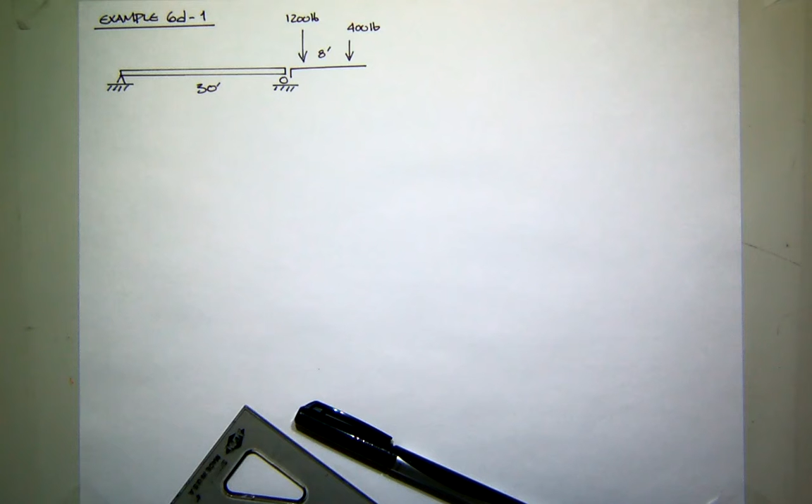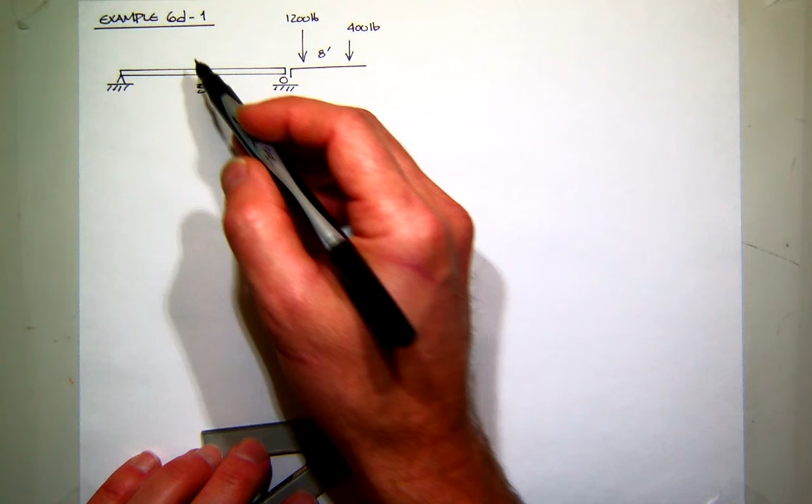Okay, so in this problem we have a simple supported beam that's 30 feet long, and we have this set of moving loads moving from the right side to the left side, and we're trying to find the location of the maximum moment.

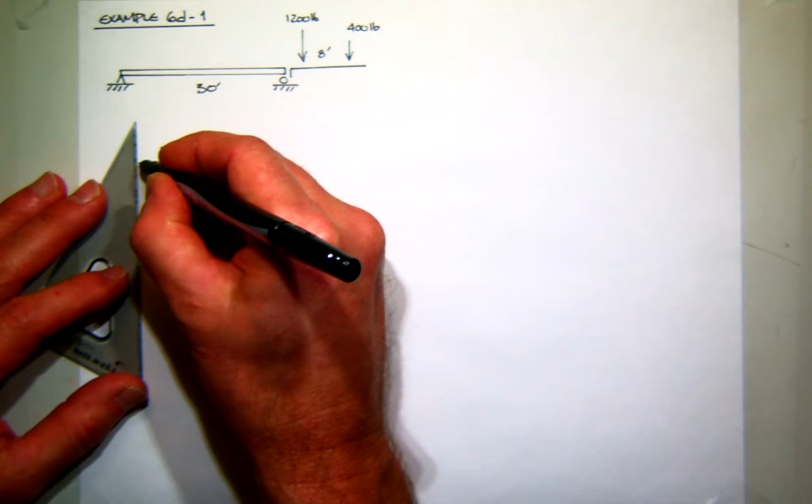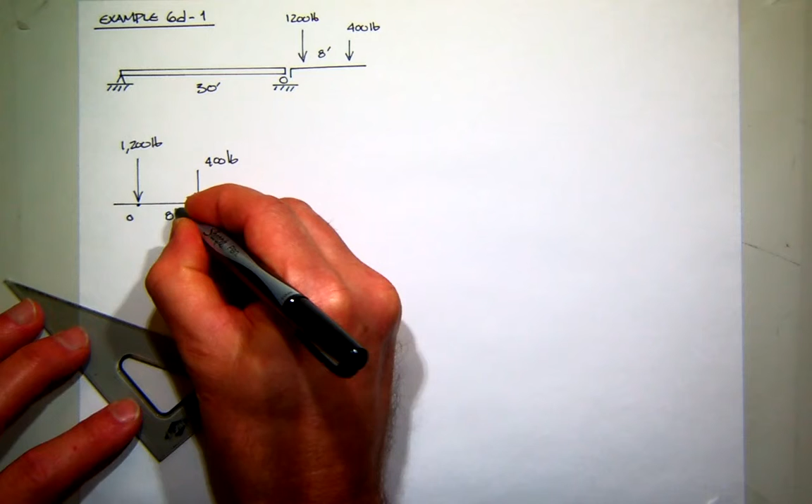Well, the first thing we're going to do is find the concentrated or resultant force and its location. So what I like to do is come down here and redraw it. So I have my 1,200 pound force and my 400 pound force, and just kind of imagine them on a line. Call this point here, say O. This is 8 feet.

First of all, what's the concentrated equivalent force? Yeah, the resultant is just going to be the two values put together. So I got 1,200 pounds plus 400 pounds, which is 1,600 pounds. So somewhere in here is my concentrated equivalent force, 1,600 pounds. That's a funky 6, but you get the idea. And I'm going to say it's some distance x

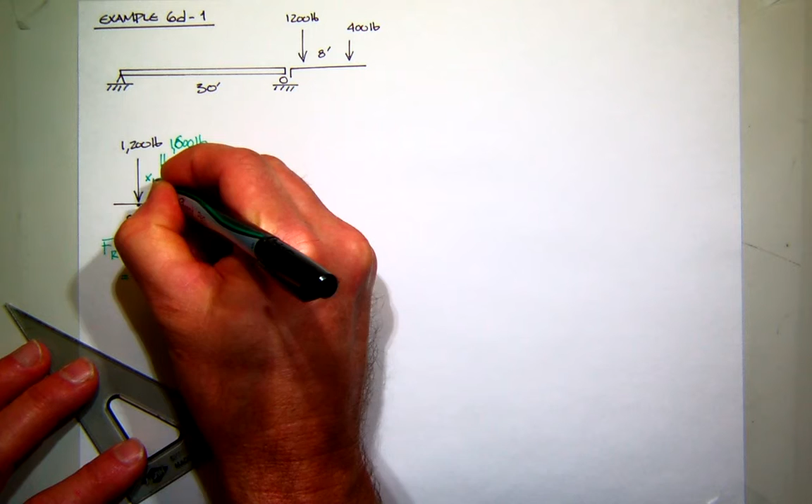from point O. So what I'm going to do is I'm going to sum moments. Not in equilibrium, they just have to be equivalent. So when I sum moments, and I'll use right-hand rule, I'm going to sum moments about that point O. When I do it for the real force system, I get minus 400 pounds times 8 feet, which is minus 3,200 pound feet.

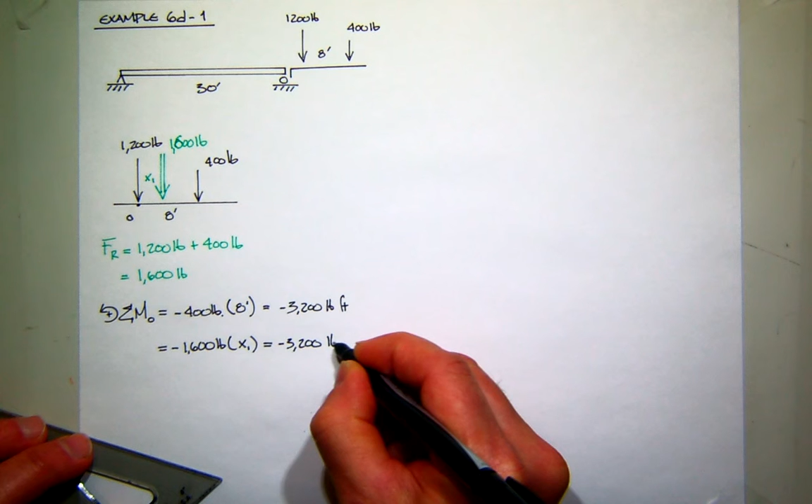And I do it again now for my concentrated or resultant force, which would be minus 1,600 pounds times x feet. It needs to be equal to exactly the same. So I can solve for x. What is x? 2 feet. So now I know where it is.

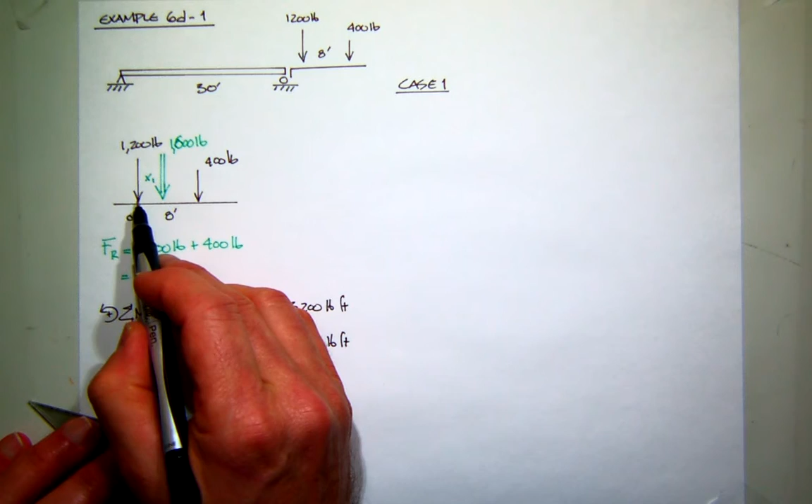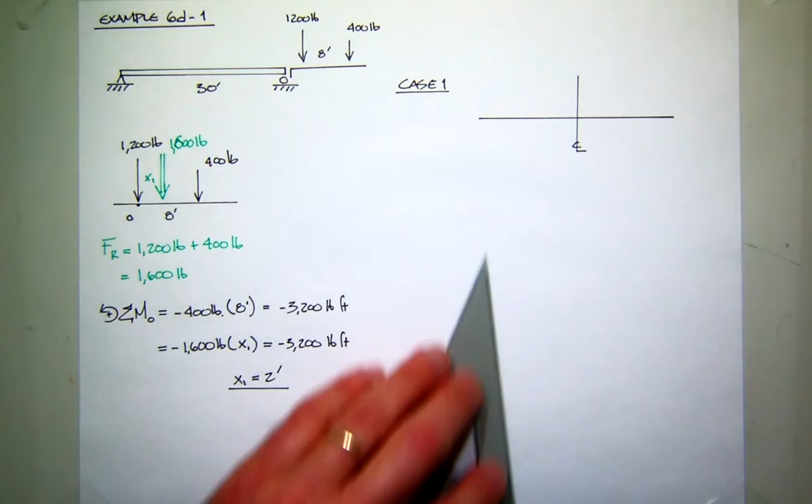So my first case, using this method that we just discussed, is to about the center line of the structure balance the first force and the resultant force. I'll try to draw this a little bit larger. Let's see if I can do it. So here's the center line. So I'll balance it. So on one side I'll have my resultant force of 1,600 pounds, and that will be 1 foot on this side, and 1 foot on the other side is my 1,200 pound force.

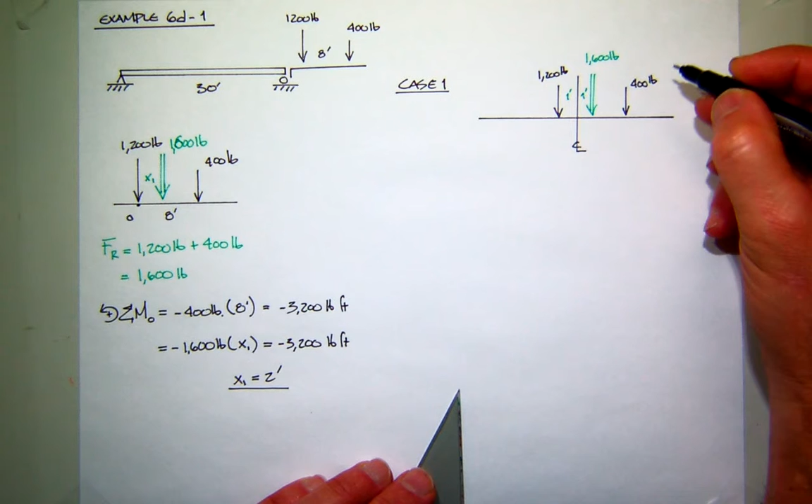Then how many feet back to the 400 pound force? Well, from the resultant, it would be 6 feet. You see that? Now the point I'm trying to find the moment is right here. So I'll call that moment 1.

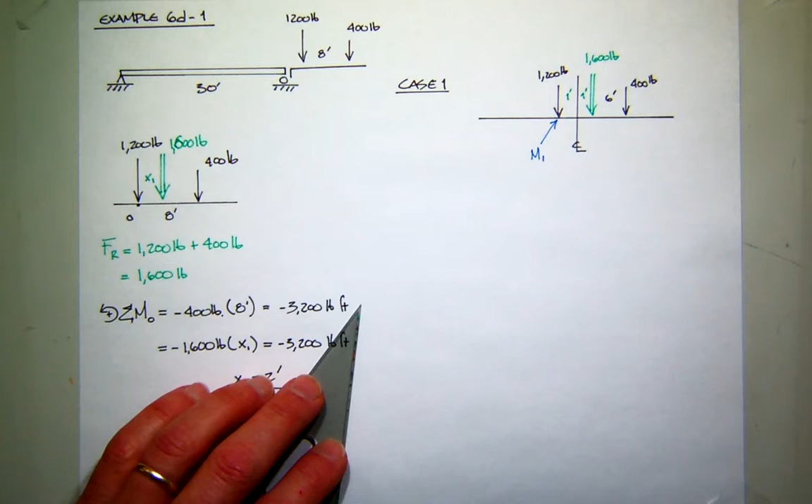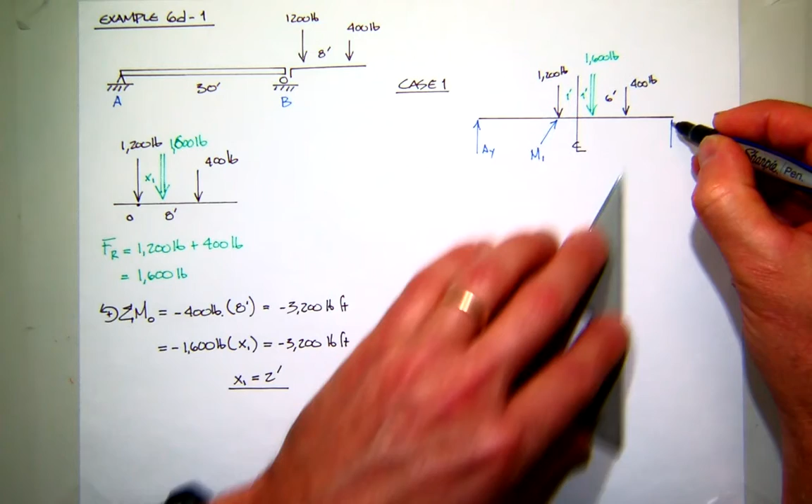So I need to find my reactions, which I haven't labeled this, but let's call this A and B. So I'll have AY and BY. So I think it's pretty simple to see that if you cut the structure here and decide to work the left or the right side, looks like the left side is going to be a lot easier. In fact, all I need to know is AY, right? And I should be able to find the moment here. If I work this side, I'd have an additional force to deal with. So let's do that. So I need to find AY.

How do I find AY for this structure? I'm going to sum moments at B. Now here's where you have to make a choice, and I think the choice is a simple one. Do you work the real force system or the equivalent force system? The equivalent force system. You don't do both together. So I'm just going to use the equivalent system.

So when I sum moments at B, the only thing that's creating moment about B is my resultant force and AY. So the resultant force creates positive moment. What's the distance from B to that? 14. Well, the whole thing is 30, so the center line would be 15, right?

So it looks like it's going to have a moment arm of 14. And then AY creates negative moment with the moment arm of 30 feet. So what's AY equal to? Somebody will have to help me with that. 1,600 times 14 divided by 30.

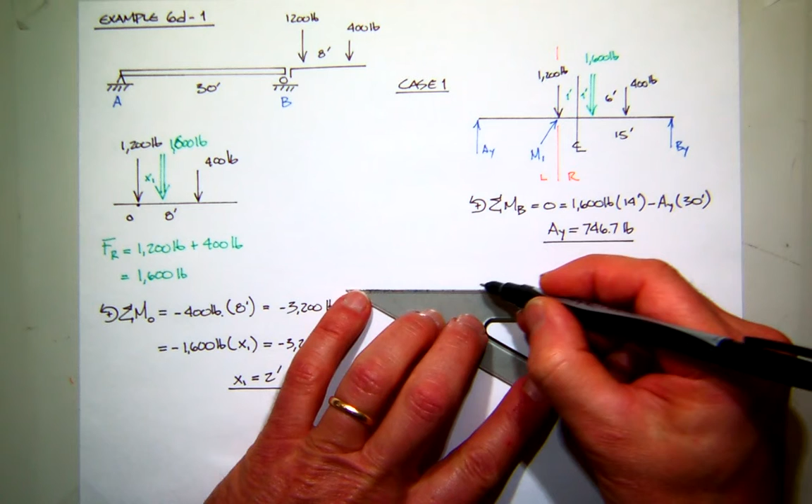Okay, so now I cut the structure. Look at the left side. I have my reaction, 746.7 pounds, and I have my internal moment. I'll call it M1. What's this distance? What's the distance from A to here? 14 feet.

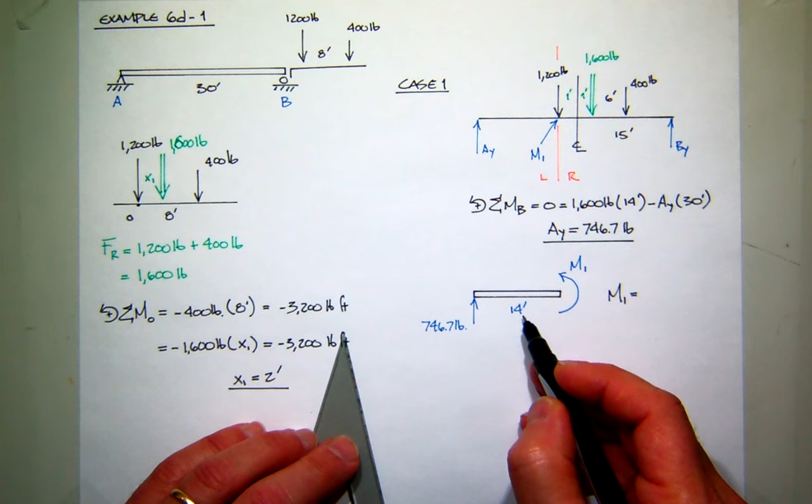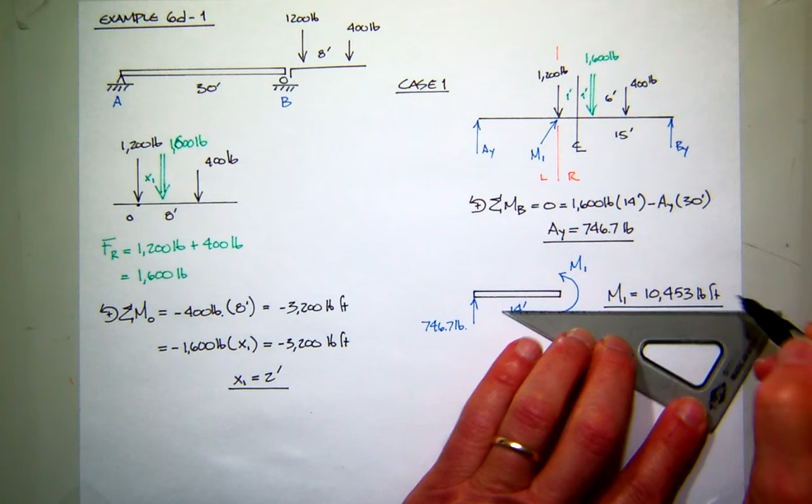So I think you can see if you sum moments, the moment's going to be equal to 746.7 times 14, which is 10,453 pound-feet. So that's the moment at that position. Everybody see that? So now I just have to do it again.

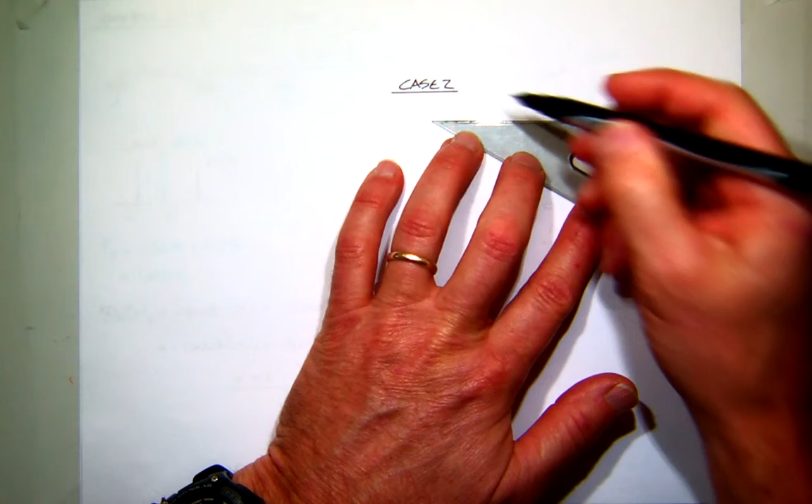I'm kind of running out of room here, so I'll just put a second sheet down and get it in the right spot, and we'll call that case 2. So again, I'll draw my beam, and I'll locate the center line. Now this time, I'm going to position the second force in the sequence with my resultant force.

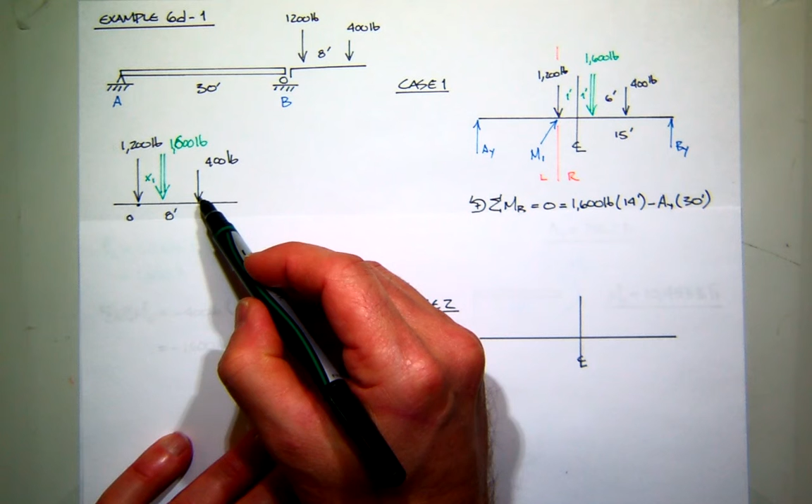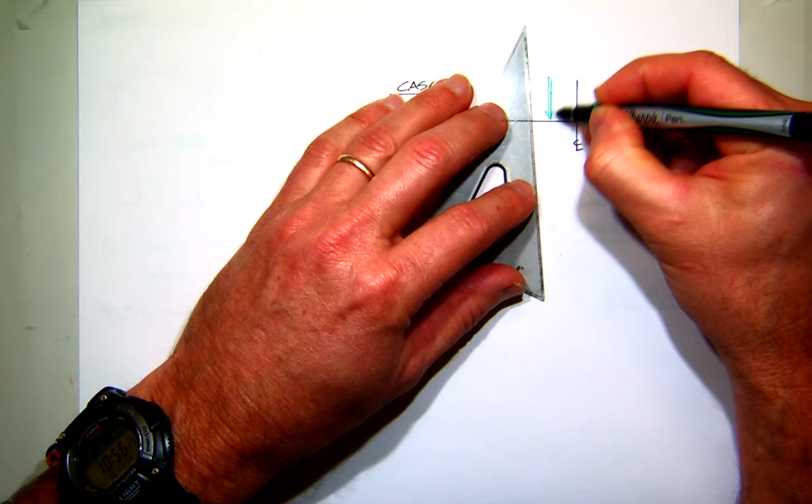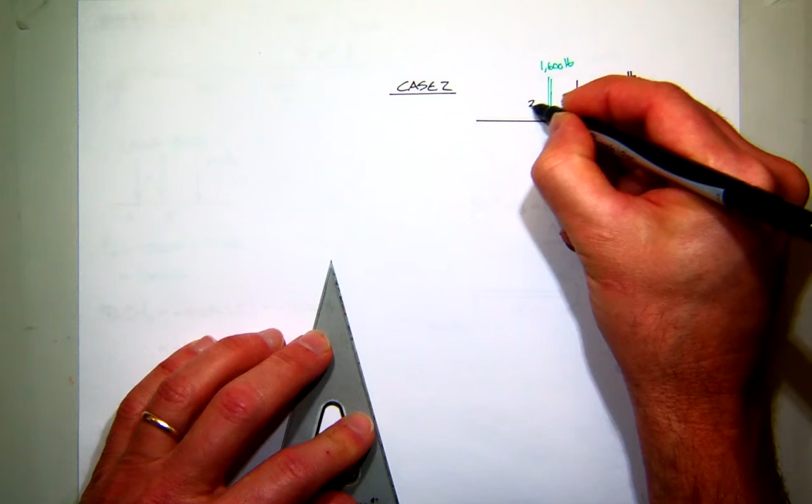That has a distance of 6 feet, so that'll be 3 feet. So in that case, I'll have the concentrated or the resultant force here, that's 1,600 pounds, at 3 feet, and then 3 feet behind it will be the 400 pound force, and 2 feet in front of it will be the 1,200 pound force. And where am I looking for the moment? Right there. Call that moment 2.

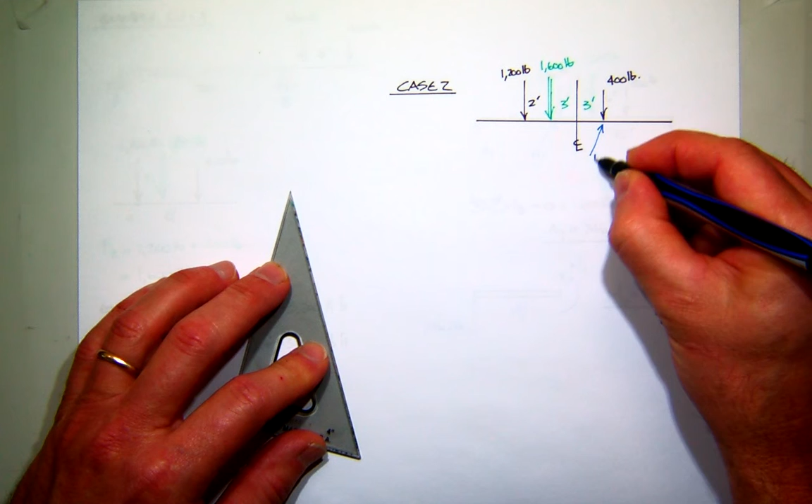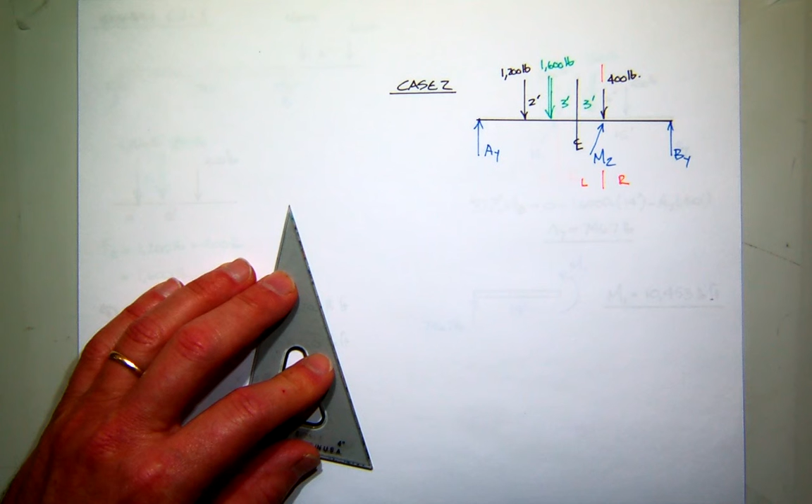So when I'm evaluating this structure, I have reactions at A and B, and I'm going to cut the structure here. Do I want to work the left side or the right side? Looks like the right side is going to be easier. If I work the right side, I need BY. So when I find BY, I'm going to do what? Sum moments at A. So let's sum moments at A, make sure I'm in equilibrium. Again, we have to use either the real system or the equivalent system. I think the equivalent system is simpler.

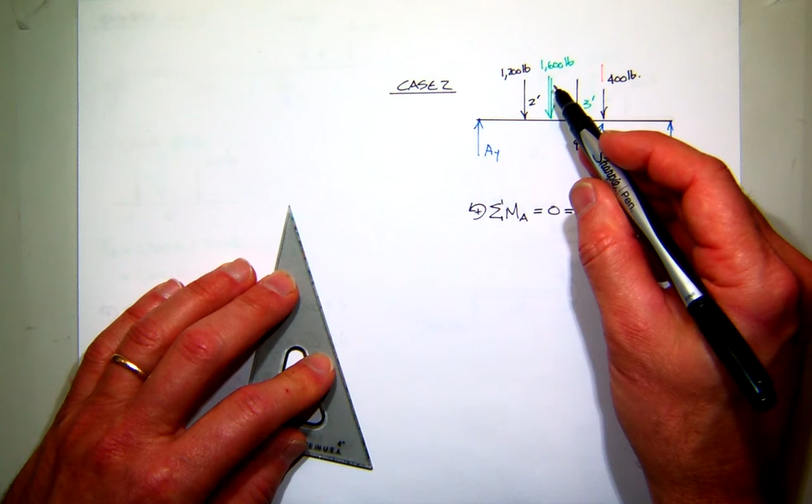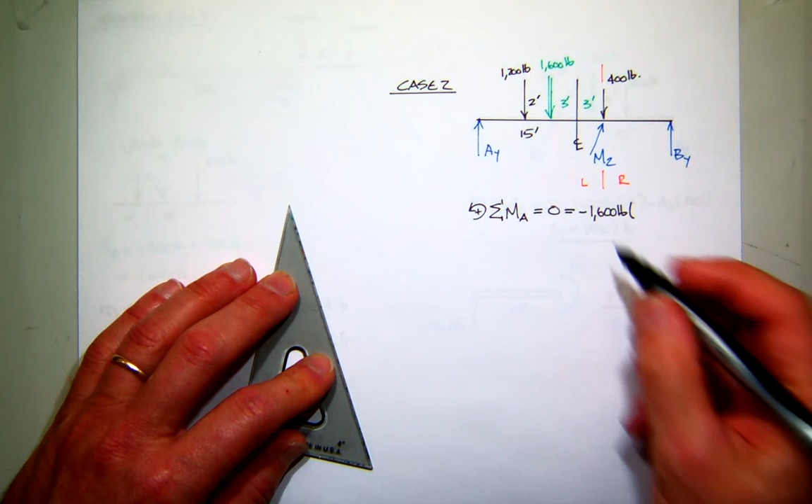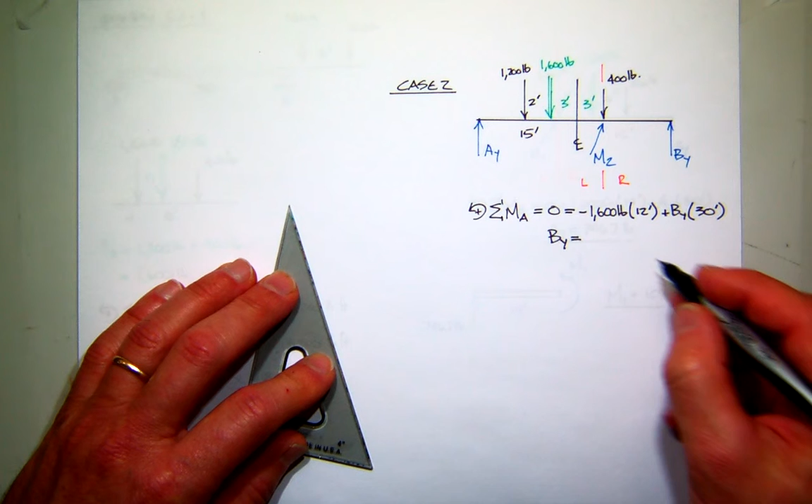So summing moments at A, the resultant force creates negative moment about A, has a force of 1,600 pounds, and a moment arm from here to here. Remember, the total distance is 15 feet, so it looks like it's going to be 12 feet. And then BY creates positive moment at 30 feet. So what's BY? 1,600 times 12 divided by 30. Negative 640 - negative? Oh sorry, I didn't mean that. Okay, 640. Yes, sir. Okay.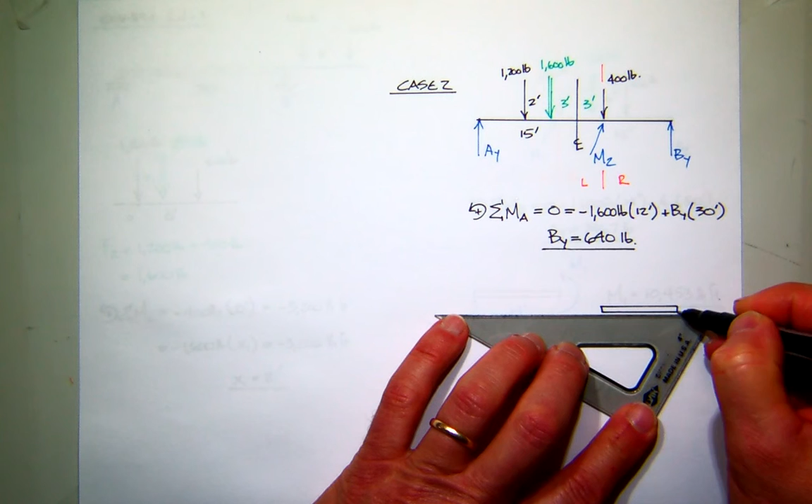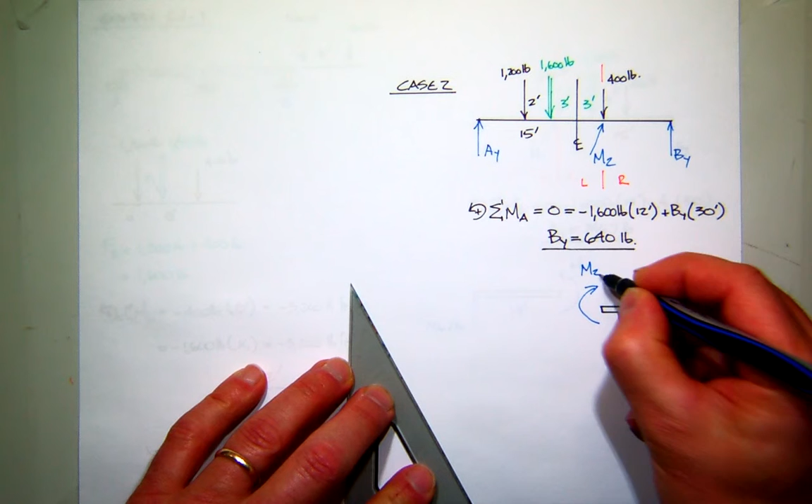And now we're working the right-hand side, so I'll draw a free body for that. And on that, we have our BY reaction, which is 640 pounds. And we're looking for this moment here, I'll call it M2, and that distance is 12 feet. So I think you can see the moment at 2 is going to be 640 times 12. What's that? Mr. Isbell, what's 640 times 12? You got 640 in there, multiply by 12. 7,680.

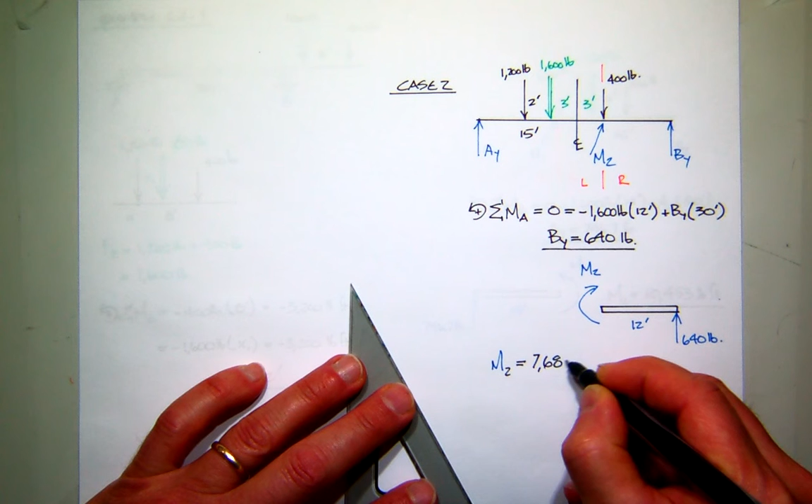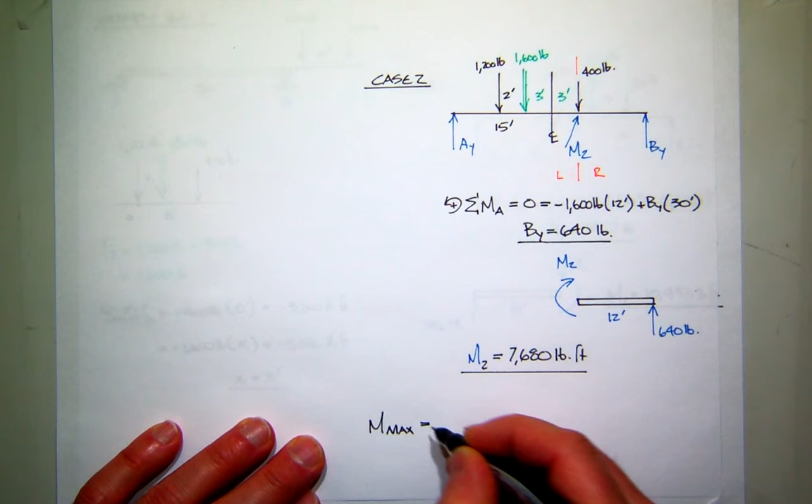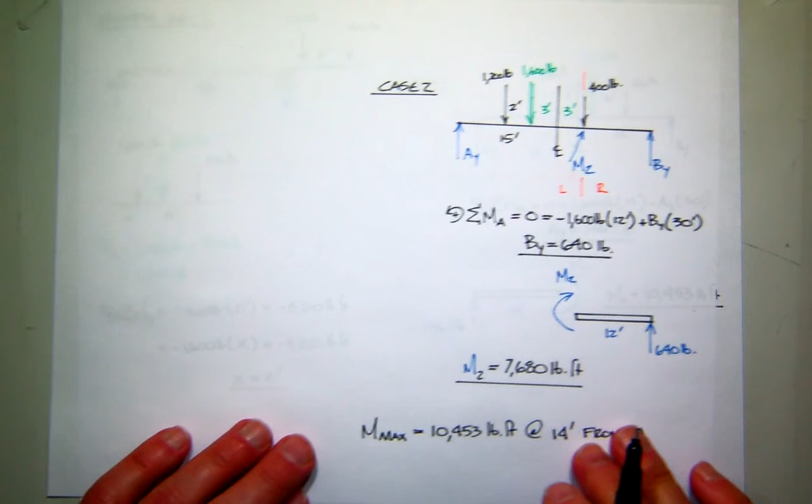So I think you can see that case 1 is the larger of the two cases. So the way we would finish this is I would say the maximum moment in this entire beam is equal to 10,453 pound-feet, and we'll say at 14 feet from A. So that not only tells me the value, but it tells me the location.

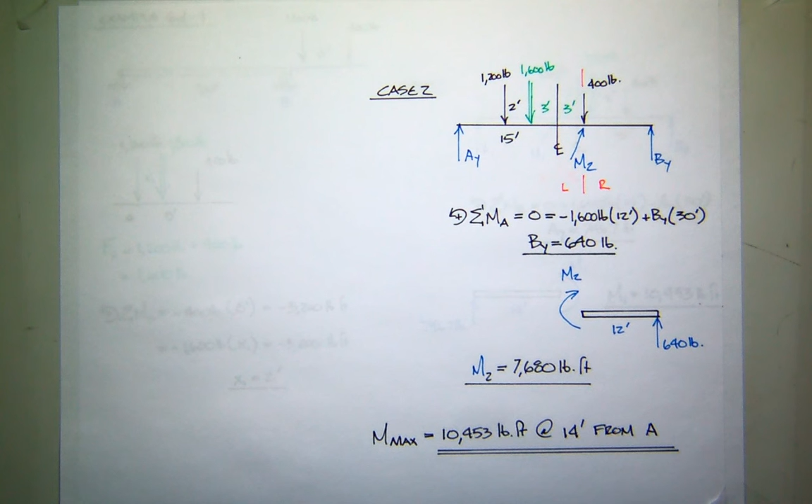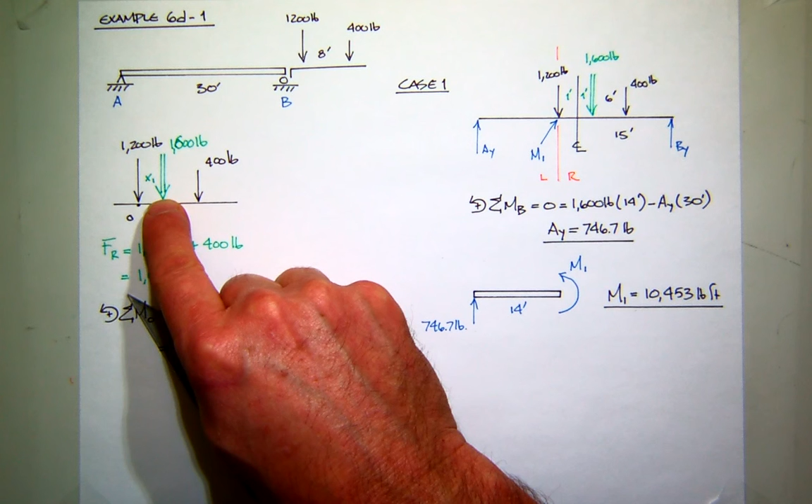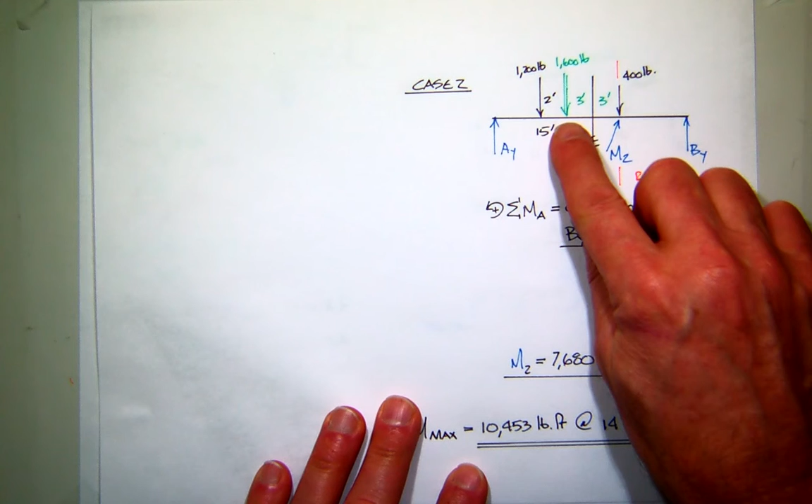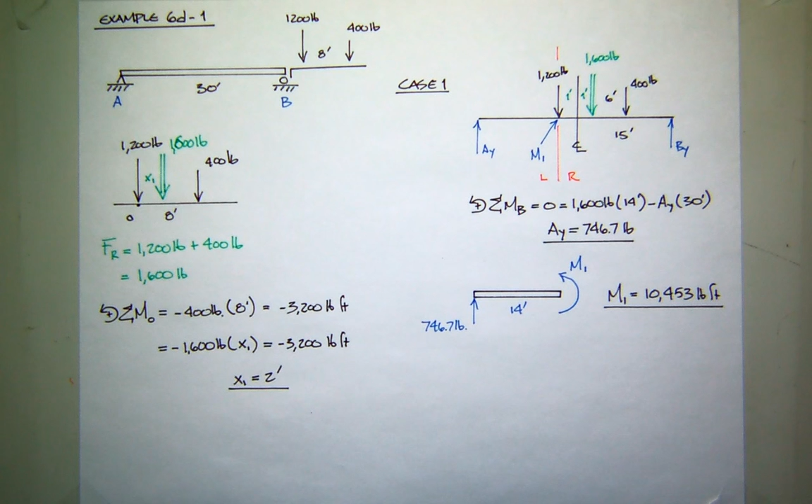Any questions about that? Can you go back to the original drawing? Sure. So the way it shows it, just to make sure I'm clear, is on each side of that roller, correct, where you place the virtual or the resultant load, right? So what's on the left side? Okay, what you do is you take each load in the sequence - we just happen to have two here - and you balance each load in turn with the resultant about the center line. So if I do the first load, called it case 1, I balanced them about the center line. So I found that distance x1 was 2 feet, so that's why it's 1 foot and 1 foot. They're equidistant from the center line. And then you look under the load. So in the second case, then I'm balancing the resultant load and the second force equidistant about the center line, and I'm looking under that case. So you can see if I had 4, 5, 6, 7, 8 loads, this could be a long process. In terms of an exam problem, 2 or 3 - 2 is more likely, 3 is probably stretching it. So any other questions?